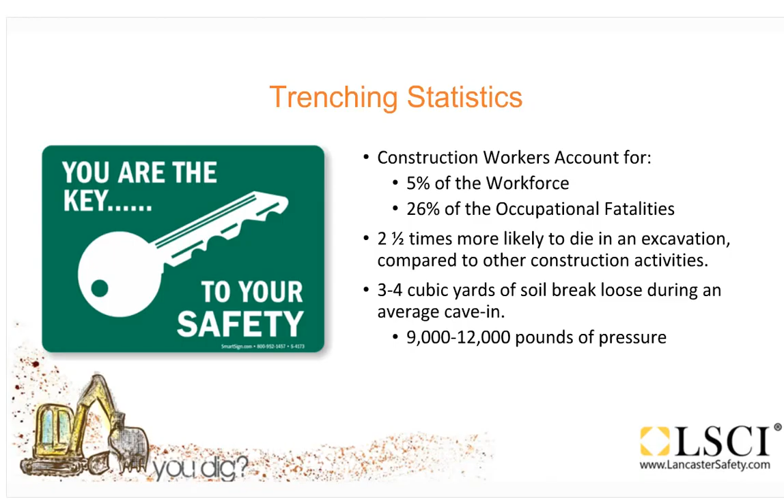1 cubic yard of soil can weigh about 2,000 pounds. So to put that in perspective, most commonly produced passenger cars currently are roughly around 4,000 pounds. Now, if we add water to the soil, a cubic yard could weigh upwards of 3,000 pounds. The thing is, a cubic yard of soil is not a lot.

In typical cave-ins, especially if a spoil pile is stored too closely to the cut, you can have multiple cubic yards of soil breaking loose at one particular time, in one instance. So it may not be all that uncommon for a great deal of material to fall on an employee and subsequently encase them. According to the BLS, there were 130 fatalities during the years 2011 to 2016.

I don't have current data from last year as of yet. That's not been published. The hope is that over the last couple of years, at least from 2016, these numbers have declined. We started to see a bit of an uptick or an upswing in fatality numbers related to trench work in 2016 alone. I believe those numbers doubled from the 2 previous years.

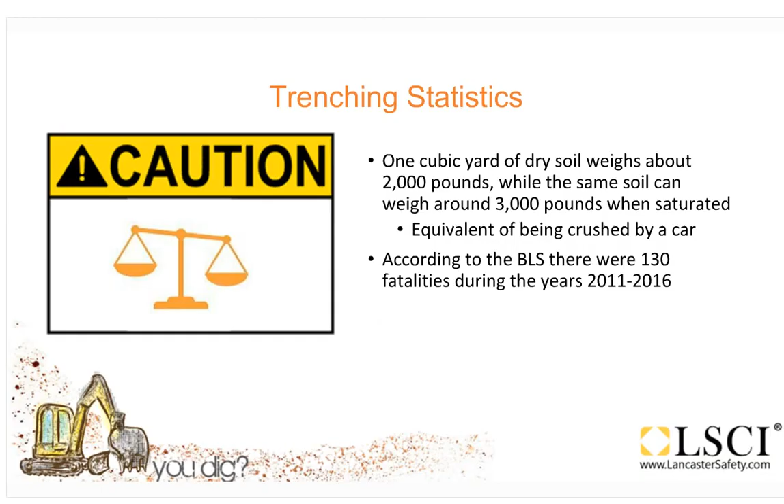As far as OSHA's National Emphasis Program is concerned, we'll talk about what it is. There are situations that arise in various industries where OSHA will focus their efforts a bit more. And this is one, largely in part due to the significant numbers that we saw a couple of years ago. What this essentially means is that they're going to spend more time. They're going to be more active. They're going to be more involved in not only OSHA outreach and assistance in training, but also enforcement.

Can any company be picked? This current emphasis program for trench work has been in place since October 1st of 2018. The first 3 months were geared a little bit more towards awareness and assistance, and we're subsequently beyond that right now. After that, we're going to see more on the side of enforcement. But can any company be picked? The answer to that is yes.

Compliance officers are essentially now instructed to stop if they see trench and excavation work being performed. So they don't need a specific reason. There doesn't have to be a referral or a complaint or a death or a significant injury, although they will actively go out and inspect those instances as well. But it may be exceptionally random. A person could be traveling to and from a location, see some work that's being performed, and just decide to stop.

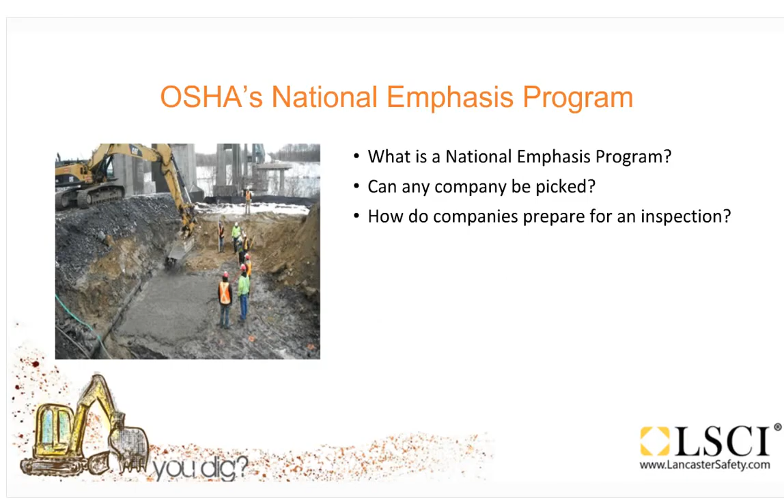Before any earthwork begins, before somebody even sticks a shovel in the ground, every effort should be made to identify underground structures and utilities. That's a hazard that we'll discuss a little bit later on in this webinar. But ultimately, if a company digs down into some type of utility or some other type of structure, that could be exceedingly hazardous for an employee nearby, as well as quite costly for the company.

Competent person requirements. So this is something that I mentioned at the start of the webinar that we'll hit on, and ultimately we're going to discuss a lot of the different types of conditions and variables that a competent person should be able to identify as we progress through the webinar itself.

But at a minimum, that skill set should include being able to identify and know and understand safety requirements, being able to identify soil type, soil mechanics, and be able to perform an assessment or inspection to determine the soil type, what protective systems should be used, and other types of supporting equipment, and then being able to determine if there's a potential for a hazardous atmosphere or some other type of hazardous condition that could affect an employee when they're in a subsequent trench or excavation.

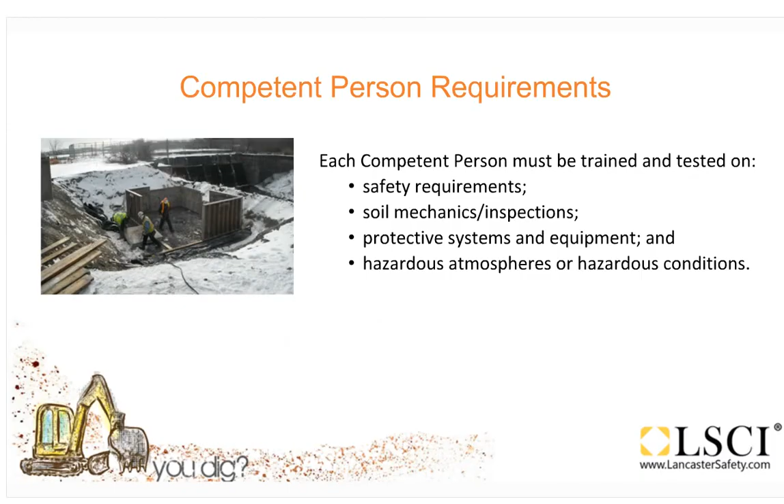How often do inspections need to be conducted? Typically, this is something that needs to happen at the start of the shift, the start of the day, before an employee ever steps foot in a trench or excavation, as well as continuously. I mean, conditions change. Like I said before, there are a lot of variables that affect soil stability and structure. Most job sites, there's a lot of activity. You could have movement of mechanical equipment, you could have movement of mobile equipment, you could have adverse weather conditions come into play. So it's something that this individual needs to keep an eye on continuously. One time a day is not going to do it.

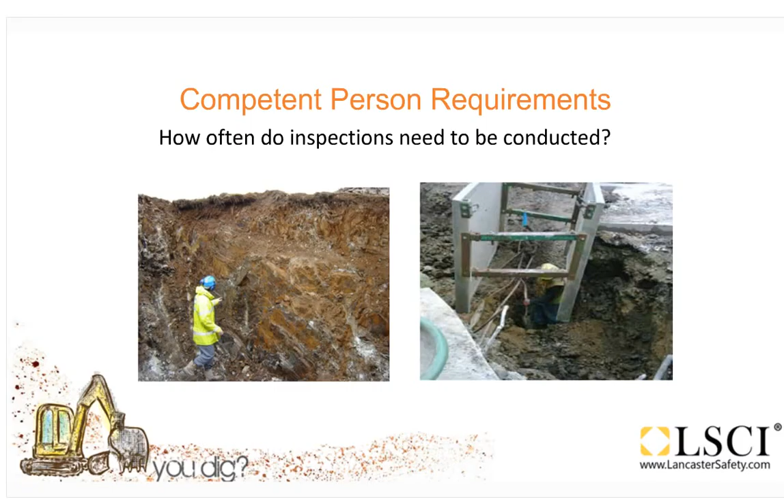We'll get into some of the various site hazards that employees may encounter when out on a field location. And one of the first ones, you typically can't have trench or excavation work unless you have heavy equipment operation. So excavators, bulldozers, earth moving machinery, compactors, material handling equipment, and the concern here is obviously struck by or caught in between. Employees should make every effort to stay clear of this equipment.

Wearing a high-vis vest or some type of vest that has a significant amount of retroreflective material may help, but ultimately you have to make direct eye contact. And keep in the back of your mind that no matter how good an operator is, if you're in a blind spot or you're behind a piece of equipment to where they can't see you, the likelihood is that they're going to have no idea that you're there. So proper body positioning is critical.

Vehicle traffic. A lot of excavation and trench work is performed in such a location to where it's close to a roadway or a parking lot. So that type of exposure poses its own significant risks. One being the ever more major distraction that drivers have with cell phones and other electronic devices when those are being used. So many states have pretty clear-cut guidelines for traffic control, especially if a roadway or a path of travel is encroached upon. I always try to recommend to employees, though, that they never turn their back on traffic.

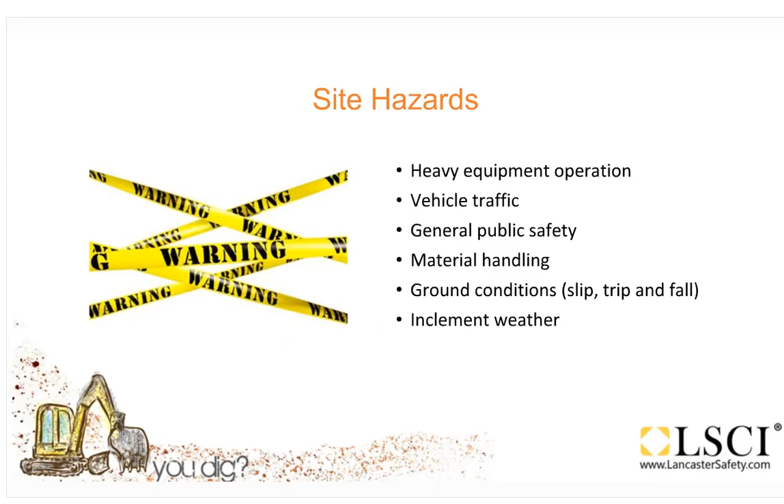Electrical contact, utilities, and various inspections. Like I mentioned before, we have to be able to try to determine what's underground before we dig. So every effort needs to be made to get line locators and other people out there, but that's not a perfect science. We've had clients who have had these individuals come out and locate utilities, and the markings have been off. So you always have to proceed with caution, especially in areas that could have been pre-disturbed or likely some type of work was completed in the past.

For overhead utilities, we have to also be mindful of overhead power lines. Approach distances at a minimum should be 10 feet. If a company needs to have somebody act as a spotter, whether during digging or just positioning of equipment, then so be it. The options are such that if you can't have the lines shut down or insulated or isolated, then you're going to have a tough time performing that work because you can't get closer than 10 feet.

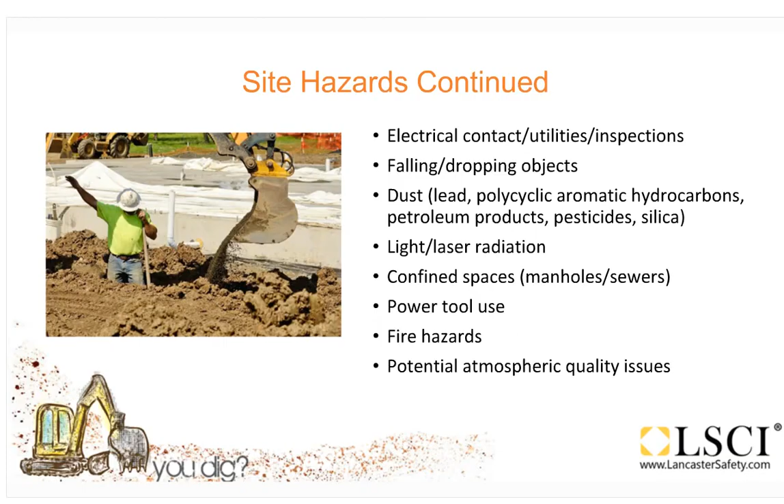So Marcy, we have the first InstaSafety poll question. Let's see if people were paying attention up to this point. Okay, sounds good, Mike. So I invite everyone to participate by answering this question. When should the competent person perform an inspection of the trench? 1, never. 2, once at the start of the job. 3, before work begins and continuously as conditions change. So please go ahead and cast your vote, and we'll give everyone just a few seconds to finish that up.

And we'll go ahead and take a look at our responses. Mike, how did we do? All right, Marcy. Well, I think we did pretty good. Hopefully we did. This was something that I spent a little bit of time discussing. And just to recap that answer, yes, typically the inspections need to be performed before work begins and as needed throughout the day as conditions change. With all the variables that I just got done discussing, everything from weather to heavy machinery and equipment operation, to even just placement and staging of other materials, that could all have an adverse effect on the soil.

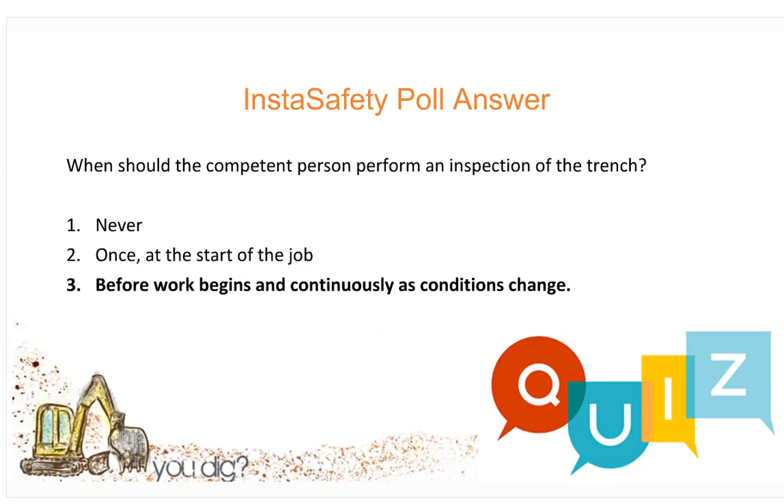So let's take a look at some of the competent person questions. And like I said before in the beginning outline, these are some of the same questions that a compliance officer is likely to try to determine, investigate, or even ask when they arrive at a location. The first question that we have here is: is the cut, cavity, or depression a trench or an excavation? There are differences between the two. Any soil disturbance, either by a piece of equipment or by hand, is considered an excavation.

A trench is typically deeper than it is wide. So that's why the majority of these requirements apply directly to trench entry. You could have an excavation that's a football field in size, and if somebody's standing in the center of it, it's not likely to pose any significant cave-in hazards until they maybe get to the edges. So there is a slight difference there. You want to be able to differentiate between the two.

Is the cut, cavity, or depression more than 4 feet in depth? Typically, once you hit 4 feet, like I just got done mentioning, there needs to be some effort, or requirement, to be able to identify a hazardous atmosphere.

The other, which we'll see here in a little bit, is ladder access. An employee has to have a way in and out of the trench aside from having to climb up a vertical wall. That requirement comes in at a depth of 4 feet.

Is there water in the trench or excavation? Typically, the inclusion of water is going to likely result in soil stability issues, as well as possibly covering up other potential hazards that an employee can trip or fall over. So that essentially has to be removed. An employee is not permitted to work in water.

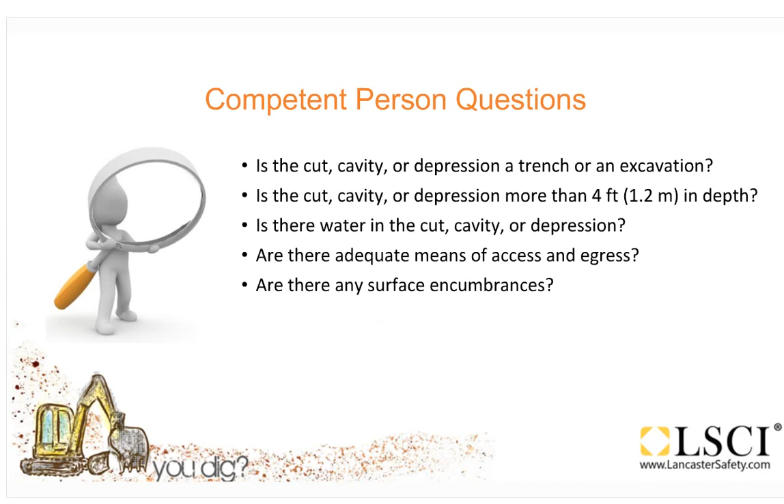Is there exposure to vehicular traffic? That was one of the main site-related hazards that I brought up earlier. I think the hazards are quite evident at this point from us discussing it. You have to do everything that's humanly possible to keep vehicle traffic out of the work zone.

Are adjacent structures stabilized? Typically, these types of structures, if we're talking about a building or a thoroughfare or a sidewalk or a bridge, a registered professional engineer is likely to have to design that system.

Does the mobile equipment have a warning system, particularly a backup alarm and audible horn? You have to be able to communicate with other employees nearby, and that's just a straight requirement. That equipment has to have an audible alarm. People have to be capable of hearing it outside everything else that's going on.

Is there a competent person in charge of the operation? Somebody, like I said, has to be designated as this individual. If there's a problem or a compliance officer shows up, everybody just can't point their fingers at one another and say, oh, I thought that was their job. There has to be an individual who's responsible for this. Like I said at the beginning of the webinar, there are a number of requirements that have to be upheld, and this should be planned out well in advance of showing up at the site.

Is equipment operating in and around the cut, cavity, or depression? A major factor that equipment can play on soil stability is just causing vibration and the breaking apart of that material. So if there's a significant amount of movement of heavy machinery and vehicles, additional barricades or supports might have to be put into place. Obviously, the last thing any company would want would be a piece of equipment or a vehicle to move far enough to the edge of a trench where it could fall in, possibly on people down below.

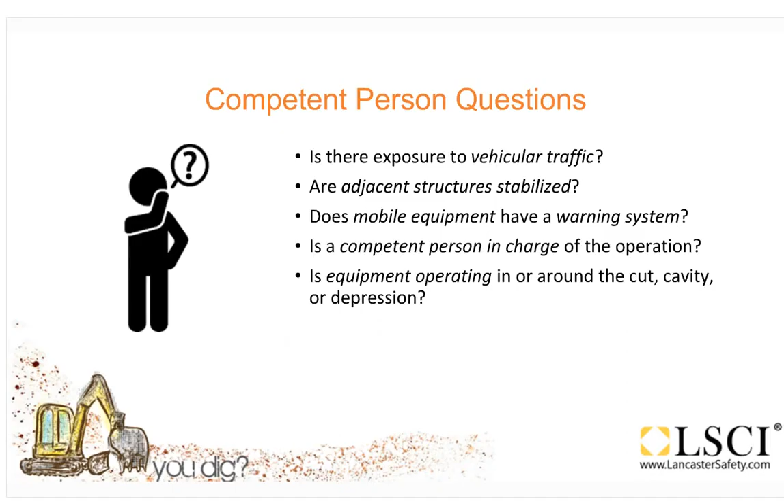Are there procedures required to monitor, test, and control hazardous atmosphere? So like I said before, typically once you hit that depth of 4 feet, it's loosely worded that when feasible, and when those conditions could be recognized, monitoring shall be completed.

We're not going to get into a lot of other specifics about performing monitoring at this time, but I can say from my experience in going out to other companies, I've witnessed and discussed a lot of really unique situations that a lot of people wouldn't have guessed happened, due to the breakdown of organic material. Even an animal dying and decomposing nearby or in the work area could have an effect on oxygen content and how that is being displaced. And that could ultimately affect workers if there's not an effort made to determine it.

Has there been a determination of soil type? So we'll take a look at some different ways to determine that. Was a soil testing device used to determine it? There are some methods that can be used. Unfortunately, a lot of them are subjective, and a lot of them depend on the type of material that was sampled. There are a couple of mechanical devices, one being a pocket penetrometer that's pretty widely accepted in the engineering community, but we'll take a look at that in a moment here.

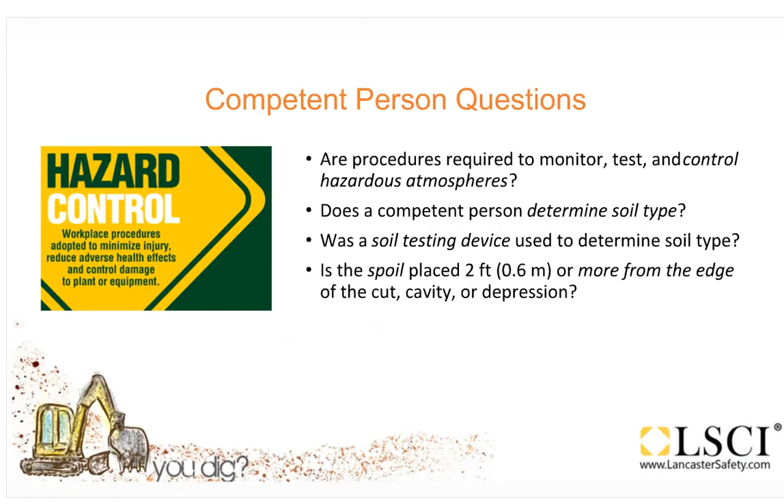This is a very common deficiency: is the spoil pile placed a minimum of 2 feet out from the edge of the excavation or trench? We'll talk a little bit more about that as we go through this, but this gives you a pretty good representation of what I was talking about.

The amount of material also has impact on the distance from the edge of the trench. 2 feet may not be enough. That is the bare minimum. So if there's a chance that there could be some type of a spoil pile or lip slide, and material could subsequently fall in on a worker that's below, remove the material, push it back, put up barricades.

Now, this doesn't just apply to soil and rock and other excavated material. It applies to everything. You're not permitted to have anything within this 2-foot space. No tools, no equipment, no materials. That has to be dead, empty space. That's a very common violation that we see: employees and companies allowing placement of said materials in that area.

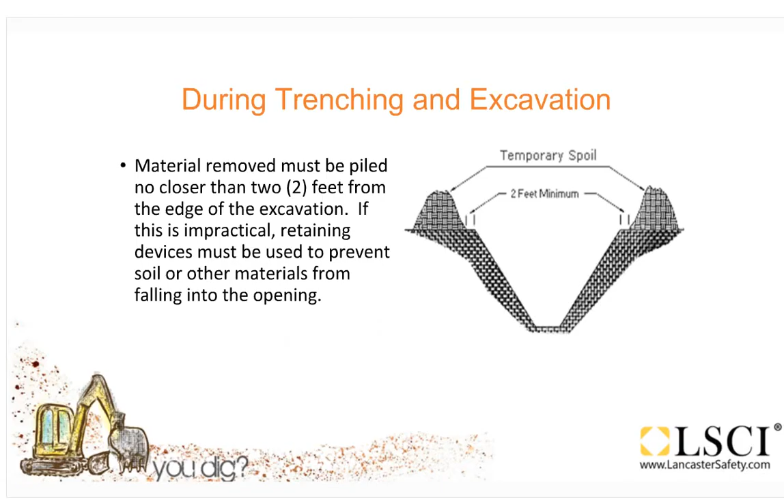Do trench shields extend at least 18 inches above the surrounding area? That's a straightforward requirement. You have to make sure that you're well above grade so items can't roll and fall into people who are now essentially trapped inside the trench box. They don't really have anywhere to go. So if a large amount of material decides to slide or roll or move, or it's kicked, if you don't have that excess sticking out above grade, it's likely to fall inside.

This last one: if trench shields are used, is the depth of the cut more than 2 feet below the bottom of the shield? You're not permitted to have any more than 2 feet worth of exposed material below the box. So that's the limit right there. And that could vary depending on the stability. Certainly the chance of somebody being completely engulfed by 2 feet or less of exposed material below the box is unlikely. There could still be a situation where something breaks loose and it falls and smashes an employee's foot or hits them in the lower leg.

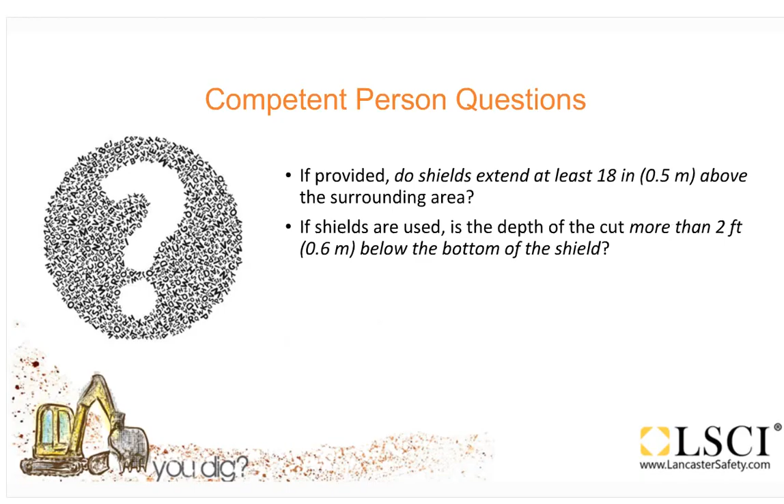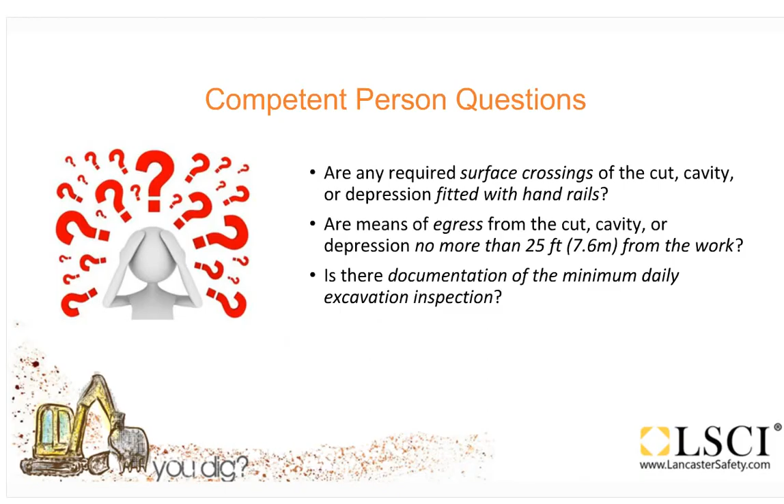And then are there daily inspections being completed? Are those being documented? That's not a specific OSHA requirement, but we highly recommend that that paperwork is completed and filled out. If there ever is a problem and you need to justify your findings or prove them, if it's not in writing, it never happened.

So this brings us to our next Insta Safety Poll question, Marcy. Okay, thanks, Mike. So again, I invite everyone to answer the following question. What is the minimum distance that spoils and other materials must be placed from the edge of the trench? 1, 2 feet; 2, 4 feet; 3, 5 feet; or 4, there is no minimum distance. So please go ahead and cast your vote. We'll give everyone just a few more seconds to finish up.

All right, Mike, let's take a look and see how we did. All right, Marcy. We spent a little bit more time on that, and that was done purposely because we have had a lot of clients over the years receive citations for this. It could be very easy to want to store items right outside of the cut to where they're easily managed and retrieved, but that's a 2-foot minimum. So hopefully everybody was able to get that one correct. We shouldn't see that being an issue out there moving forward.

All right, let's talk about some other specifics. So typically when a trench reaches 5 or more feet deep, the competent person, the employees on site, are required to perform that work while in the safety of some type of protective system, whether that's shoring, shielding, sloping, or benching.

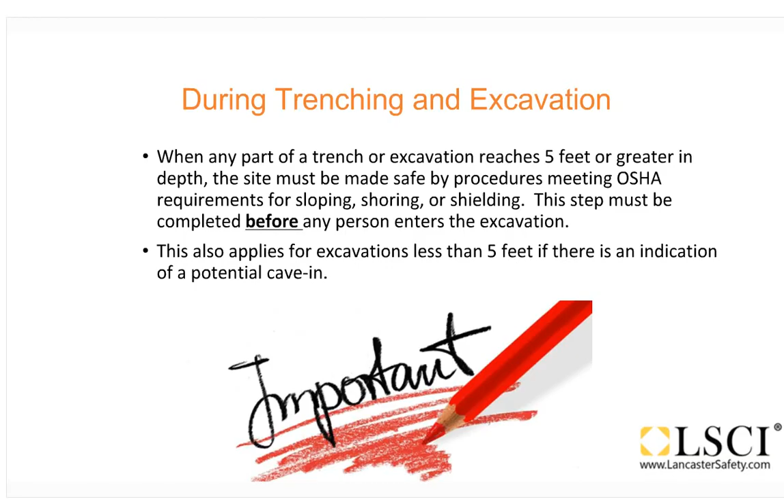If there's a collapse, you're going to be in the same position, which is essentially completely encased or engulfed by material, as you would if you were in a trench that was 5 or more feet deep. So even though there is a specific depth that would trigger these requirements, it's the responsibility of the competent person to go above and beyond that when necessary.

Just to reiterate this, we mentioned the requirement to have a ladder in place. Very, very commonly cited component of this standard. Once you hit that 4-foot depth, a ladder has to be included. It should extend at least 3 feet out above grade, just like the ladder would be required to be set up on any other job site. It should also be secured to prevent it from sliding or moving around, especially when an employee reaches the top, so the bottom doesn't kick up in the air.

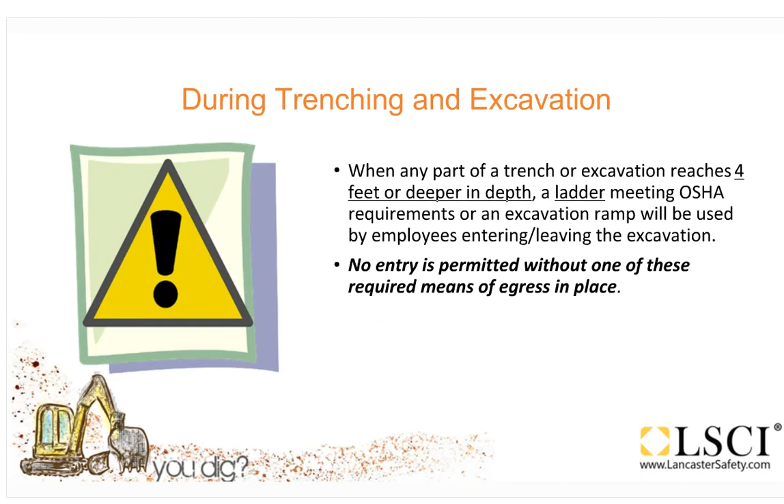Again, I mentioned this earlier as far as the 25 feet of travel and then coming to an additional ladder to aid in egress, quick egress from the trench. That has to be available.

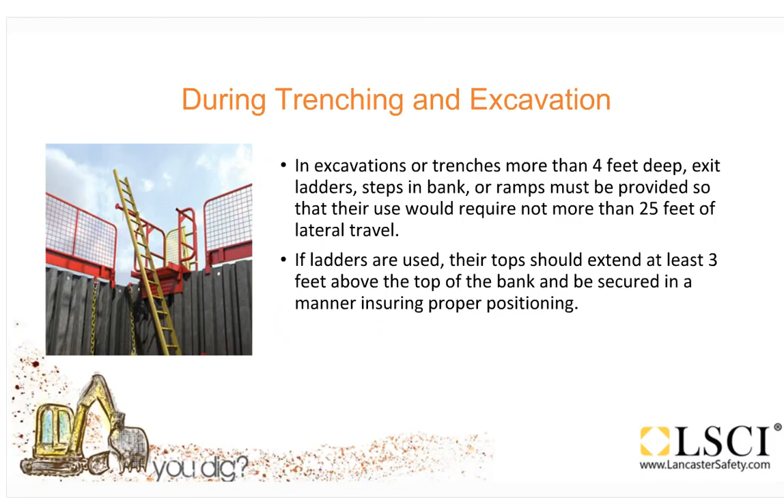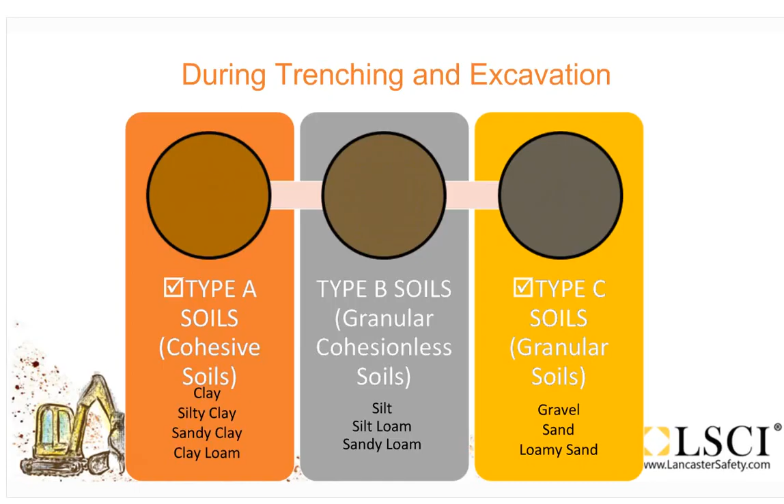But like I mentioned earlier on, there are ways to determine soil type. A lot of these are subjective, even specific down to the type of sample that was retrieved. If I take a sample of soil that maybe was somewhere between type A and B soil, but it has a lot of rock material in it, and I try to push my thumb through it, if there happens to be a rock where I'm placing pressure with my thumb, that's going to give me an inadequate reading. And it's going to alter my perception of how stable that soil is.

So there are a variety of tests. Typically, the competent person has to perform at least one visual and then one manual test. So this lists the thread, ribbon, wet shaking test, the thumb penetration, drying test, using some devices like the pocket penetrometer and the shear device.

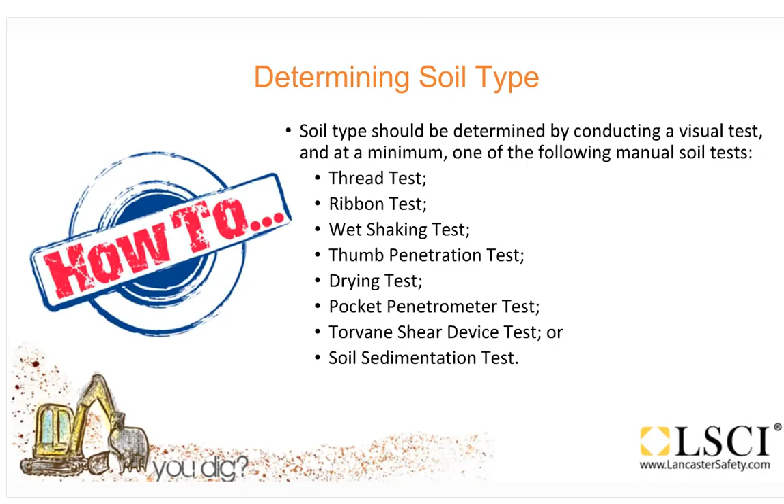Those are all ways that we can hopefully classify soil conditions and that give us an idea of the protective systems that we need to use. But like I said before, ultimately classifying everything as type C is not a bad idea. So that brings us to, I believe, our last Insta Safety poll question, Marcy.

All right, thank you, Mike. So again, I'd like everyone to answer this question. What is the least stable type of soil? 1, type A, 2, type B, 3, type C, and 4, stable rock. So go ahead and cast your response. Give it a few more seconds for everyone to finish up. And all right, thank you. Mike, what's the answer? All right, thank you, Marcy.

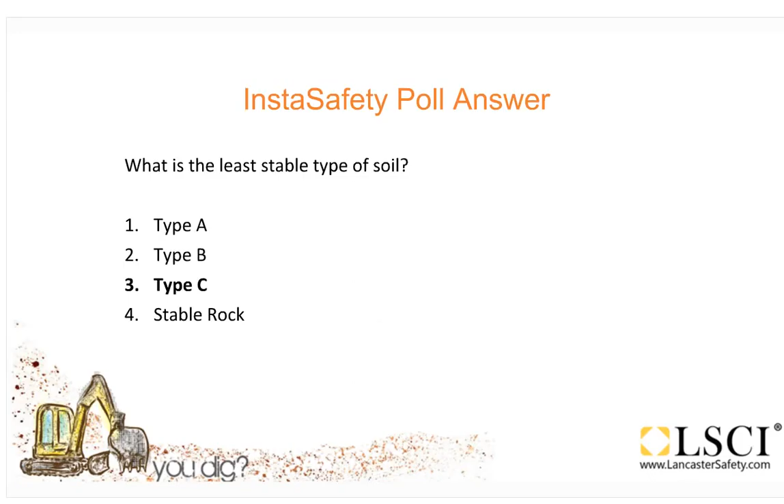Yeah, like we just got done saying, the least stable type of soil is type C. Just to reiterate, it's typically going to be comprised of more sand, granular material. It's not going to keep shape. Typically, any type of material that has any amount of water in it automatically has to be designated as type C. So the hope is that when the soil type's determined, the appropriate employee protective systems are used.

And just to throw an additional tip out there, I've had discussions myself personally with various members of area OSHA offices, and really depending on where the work's taking place, you're probably going to have a hard time arguing type A soil, especially if a lot of the excavation and trench work is taking place near existing utilities or where soil was previously disturbed. It's not going to be virgin soil like you'd find out in the middle of Alaska somewhere. So the likelihood is it's probably not going to be type A regardless. It's probably going to be a more degraded version of soil.

So we have a number of different types of options here: shoring, shielding, sloping, and benching. Shoring, we're not going to get into a whole lot. That's typically not utilized frequently across the country, especially by smaller contractors. Where I've seen shoring over the years by our clients has mainly been in cities, in metropolitan areas where you have large-scale projects going on, where you have a lot of nearby utilities, sidewalks, roads, buildings, a lot of surface encumbrance that need to be properly supported.

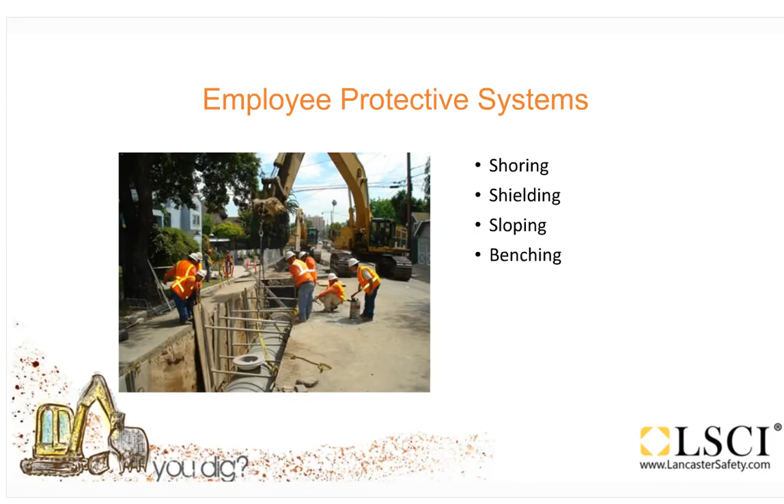Now, before we even determine this type of system, we have to make sure that we're not too deep. There are cutoffs for when a trench box cannot just be thrown down in, or we use sloping or benching techniques, and that depth's 20 feet. If we hit that depth or our work takes us deeper, that system that's being used has to be designed by a registered professional engineer. Same thing would apply if we were going to possibly undermine buildings, railroad tracks, sidewalks. There could be a significant amount of engineering involved with support structures and systems for that type of work. So I wanted to throw that out there before I get into any more.

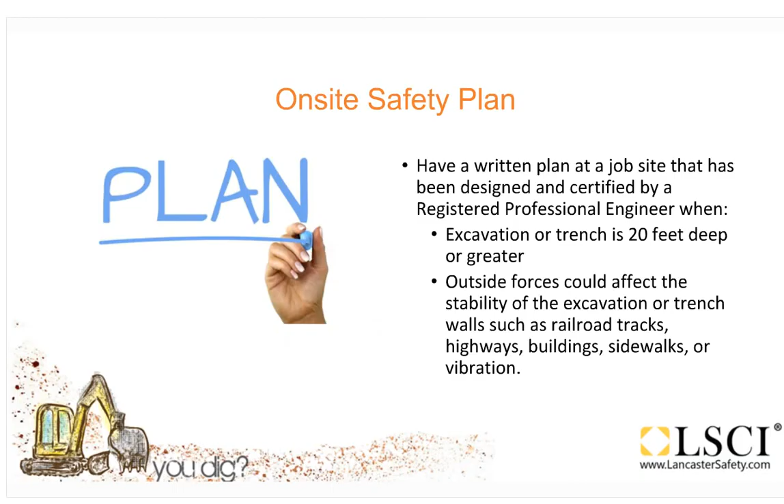Now, all of these systems that I just mentioned have their pros and cons. Some things to keep in mind when using trench boxes or shields: make sure that the trench is as small as possible. It's as narrow as possible to essentially fit the box in without the ability for too much lateral movement, side-to-side movement. We can have a situation where if there's too much space and a trench box is placed, material caves in from one side to the other, could possibly roll it or shift it. You couple that with maybe the fact that the trench box isn't completely recessed all the way in the trench, and you could have one side maybe pinning somebody down beneath it. So make sure that it's as small as possible, and that excess is backfilled.

The shields may not be subjected to loads exceeding those which the system was designed to withstand. You have to have your tabulated data on site too. So keep that in mind. That has to be available. But like I said before, especially with significant depths, the soil type has an effect on the structural stability of the protective system itself. Type C soil is likely to impose a lot more pressure. Type C soil that's saturated is going to likely impose a lot more pressure on the system. So you have to make sure that box, if you want to refer to it as that, is engineered and designed to support worst case scenario in the event of a cave-in.

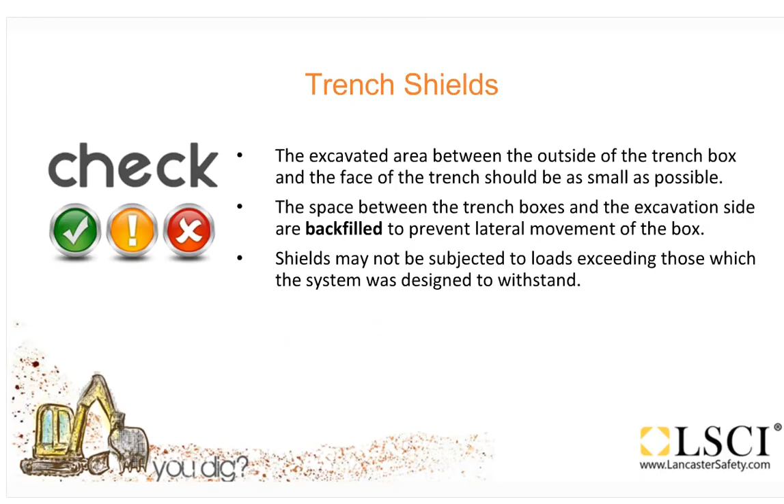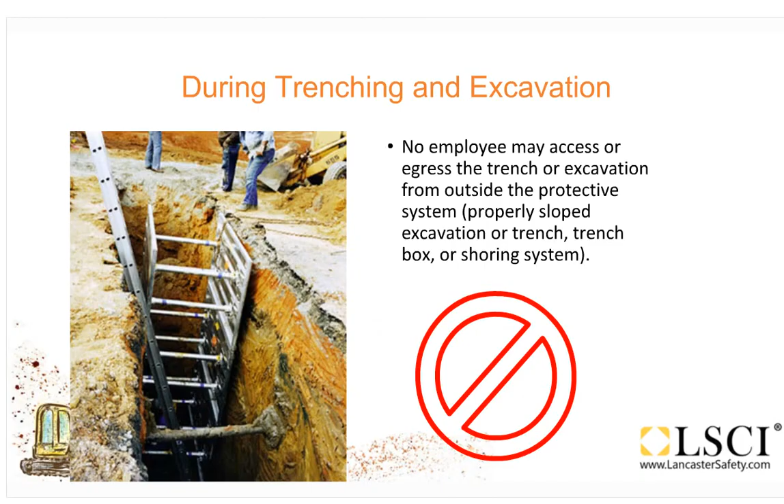This is a good depiction of an improper setup. Employees are not permitted to exit the safety of the trench box for any reason, let alone to get in and out while accessing a ladder. So if the work is cumbersome, there are space restraints, then enough room has to be made for the employee to be able to access this equipment while in the protective device itself.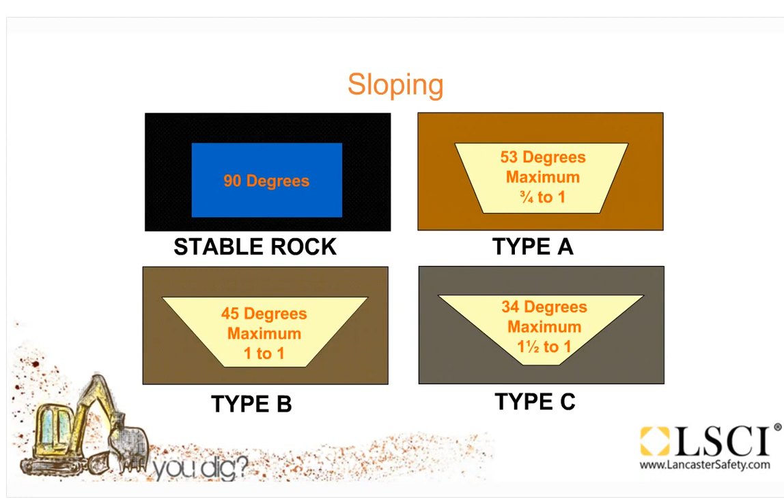Now, the unfortunate aspect of using sloping techniques is that sometimes our work takes us into areas where we just don't have the room for this. Obviously the time it takes, there are a lot of additional added costs as a result of moving this much material. So that all has to be weighed out. If the site is big enough and the time, the funding, the scope of the job allows for it, this is probably one of the most effective ways of preventing a cave-in for an employee, removing the material that could otherwise cave in at all.

And then benching techniques. This is very similar to the sloping that we just got done looking at. We're essentially removing material that could otherwise collapse or break loose in the event of some type of soil disturbance. But there are only certain types of soil that we can bench. Type C soil, like I mentioned before, it's not likely to hold a shape. So this option would, for the most part, be out.

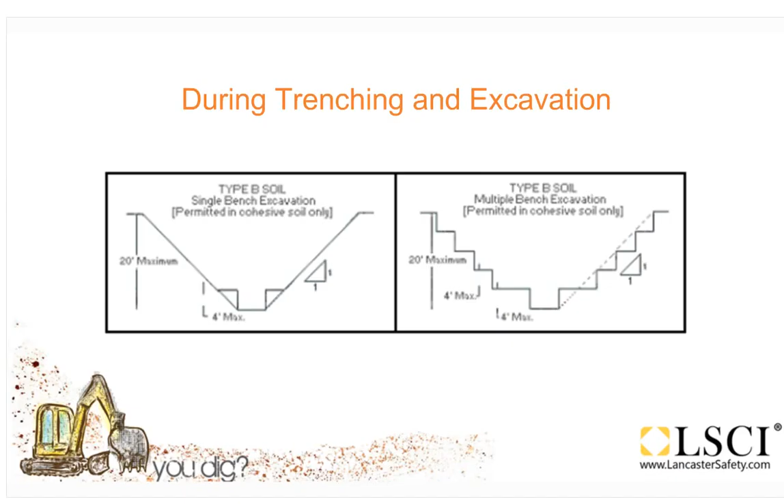So, hopefully, we were effective in going over and reviewing a lot of the different types of hazards and conditions and variables that not only a competent person but other employees on site can face and be exposed to. Like I mentioned in the very beginning, a lot of the battle here is being able to identify those problems but also have the authority to make the changes. And I would just stress, just like I do with our other clients when I go out and do training, that entering an unprotected trench is such a significant risk due to the likely outcome of death. It's not worth it. No trench is worth risking your life over.

So I know we covered a lot of specifics as well as just general hazardous conditions as we went through this. To leave you, I would just say do not enter a trench unless it's safe to do so. I know that's a very general way of putting it, but whether it comes to soil type, vehicles, mobile equipment nearby, other forces at play, at the end of the day, try to be able to recognize and identify when a condition is such that the hazards are going to greatly outweigh the reward.